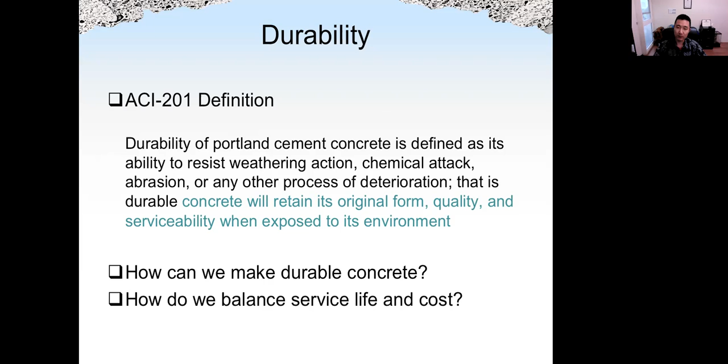There are many factors affecting concrete durability, including uncontrollable factors such as environmental conditions, and controllable factors like type of cement we use, type of aggregate. This belongs to concrete constituents, mix proportions. What is water cement ratio? How much percent we use pozzolanic materials?

Manufacturing process: how much compaction, how we can prevent bleeding and segregation, how much air percentage we use. Curing conditions, how long we cure the concrete.

For example, structure design and detailing, how much load the concrete will experience, and what's the size of the rebar, spacing of the rebar, and what is the rebar covering, or the thickness of the concrete, protecting the rebar from corrosion. So this belongs to detailing and design.

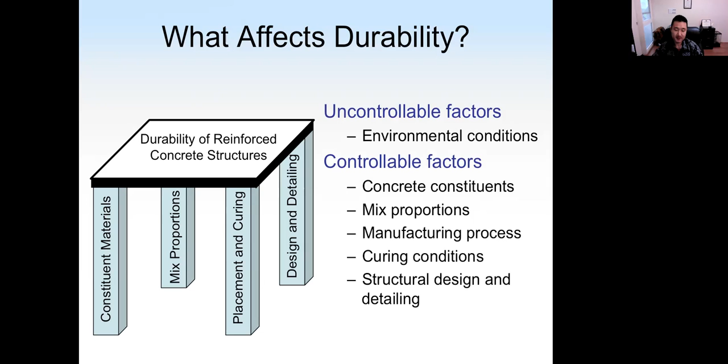Cracking and deterioration: when we have pristine concrete, there's no cracking, as long as the concrete is cast accordingly. Then the crack will occur due to loading or deterioration, such as shrinkage. When concrete has a crack, the crack will open up because water will bring harmful materials inside the concrete and do further damage. And the loading will again open up the crack.

So the crack will initiate deterioration, and the further deterioration will facilitate further cracking. Eventually, concrete will fail. The rebar protection, the concrete cover, will fall off.

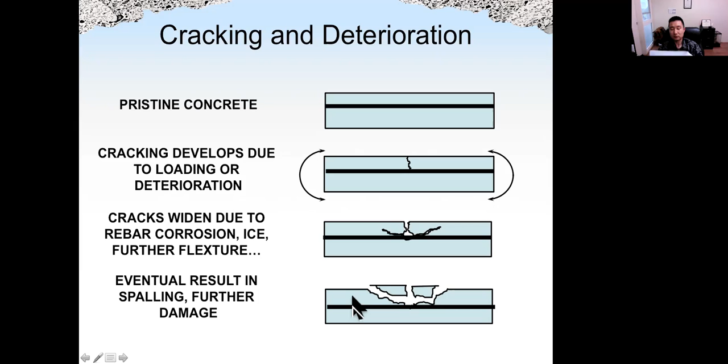So here we talk about water and concrete. We know for concrete hydration, we need water. Without water, the cement will not hydrate, so we cannot make concrete without water. But you will also know almost any type of deterioration, physically or chemically, will involve water. So let's look at the water molecule in detail.

The water molecule is a polar molecule, which means it has two ends, and the two ends have opposite electrical charge. Because of that, the water molecule will orientate along the surface of the capillary pores inside the compound. And when water is lost, we have capillary tension, and that will cause shrinkage of concrete, as we discussed in lecture number 11, which we did Tuesday this week. So shrinkage is caused by capillary tension, because water is a polar molecule.

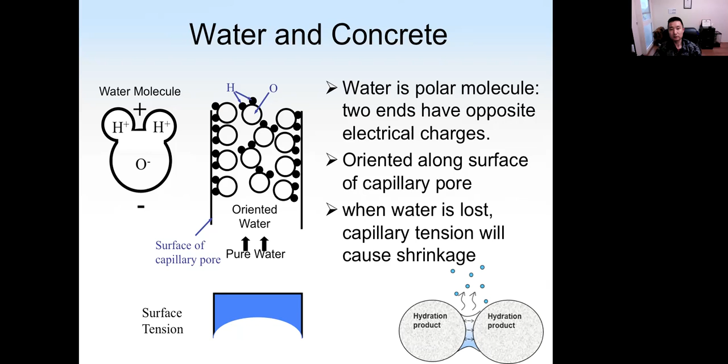Water is essential for cement hydration. Cement will not react without water, and we will not have concrete without water. Also, after we cast the concrete, curing is very, very important. The longer the curing, the better for strength and durability. So at initial age, water is good for concrete, so the longer the curing, the better for concrete.

However, after the concrete achieves its design strength, water is not good for concrete, because almost all the chemical and physical attacks involve water. Without water, concrete would last a very long time, because water is an agent of deterioration. If it moves in and out of the pores, water will also serve as a vehicle for transport for aggressive ions such as chloride, which will cause corrosion of reinforcement. Water may also bring sulfate from the soil or underground water into the concrete, and we have sulfate attack.

So is water good or bad for concrete? Depending on at what age. At early age, we do need water, without it we cannot make concrete. But at later age, water will cause all kinds of damage in concrete.

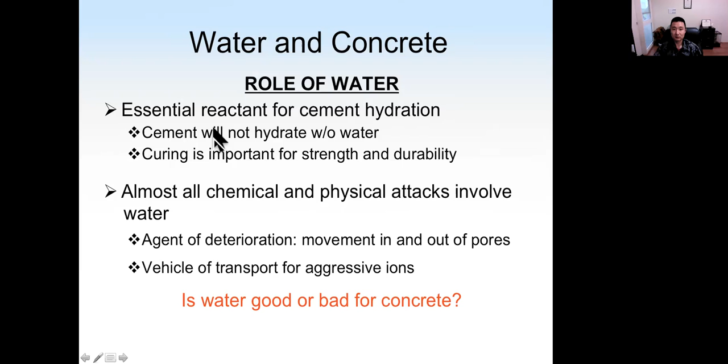So the first type of durability issues is frost damage. We also call that freeze and thawing. Before we do that, let's review three important properties of water, H2O.

The first one is liquid water has higher density compared with ice, or solid water. This is kind of a unique property of water. Other materials, the liquid is less dense compared with solid form.

The other property of water is solid water or ice is pure H2O. This means when we have a solution of certain materials, such as sodium hydroxide solution, and if we reduce the temperature slowly, and we have a mixture of water and ice, in that case the ice contains pure water, and all the salt goes to the remaining part of the water. So that's the reason why the iceberg in the North Pole is pure water, and all the salt goes into the liquid part. Of course, if we further reduce the temperature and everything becomes ice, then the salt will go nowhere and stay in the ice. As long as we have a combination of water and ice, the ice will be pure water, and all the salt goes to the liquid.

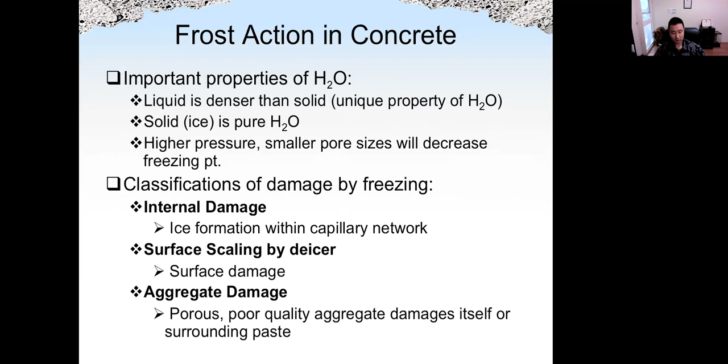So let's look at the internal frost damage, which occurs in the cement paste. There are several theories which may help explain why we have internal frost damage. Exactly which one is dominant, we do not really know. These are the potential contributing factors for the internal frost damage of concrete.

The first one is the hydraulic pressure. When ice forms, the volume will increase because the density of ice is lower compared to the density of liquid water, so the volume of ice will increase. That will cause pressure to rise in the unfrozen liquid in surrounding areas. For example, here we have an ice crystal formed. The water surrounding the ice will have high pressure because the ice volume will expand. So that may cause the concrete to crack.

Another possible theory is called osmotic pressure. When ice forms, when we have a combination of ice and water, remember in the ice all the salt goes to the remaining water, and ice is pure H2O. So the remaining pore fluid will concentrate because the salt goes into the nearby liquid. As a result, we have a difference in concentration of these salts - the liquid around the ice has a higher concentration compared to other parts of the liquid. So the surrounding unfrozen pores will drain, trying to balance the difference in concentration of salt. That will cause the so-called osmotic pressure. The remaining water will drain to the liquid near the ice, causing pressure to increase. That may damage the pores of the cement paste.

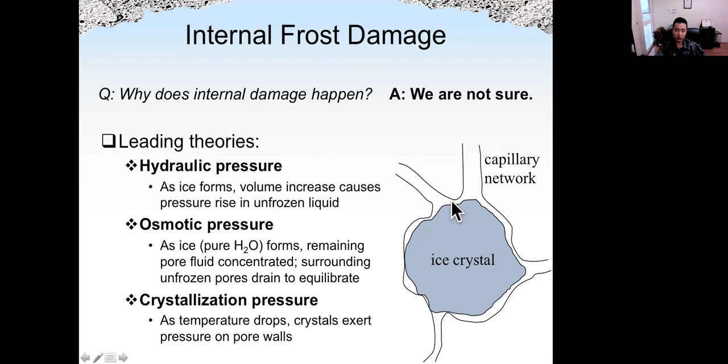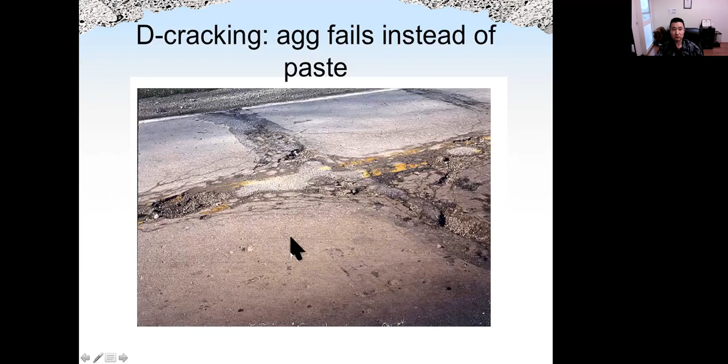Scaling damage is again caused by de-icing solution. It happens on concrete pavement. During the winter we put de-icing solution on the pavement, and that salt may cause damage in concrete. The possible reason for that is explained here.

It only occurs when we have liquid on the surface of concrete, and only occurs when the liquid contains salt, a solute, for example sodium chloride or other de-icing salt. And certain concentration will cause different types of damage.

To reduce this type of damage, we could introduce air entraining agent in concrete to reduce the possible scaling damage. The reason for the scaling damage can be explained by the so-called bimaterial effect. Let's say here we have a pooled water, and inside that pooled water we have salt, and we have concrete layers beneath that pooled water layer.

When the temperature drops below freezing, the water becomes ice, and that will form a well-bonded composite material. So we have an ice layer on top of the concrete layer. Here alpha ice means the coefficient of thermal expansion of ice, which is much larger than the coefficient of thermal expansion of concrete. So when temperature drops, the shrinkage of the ice layer will be much more compared with the shrinkage of concrete. However, we have a very good bond between the ice layer and the concrete layer. So when temperature drops, ice will contract more than the concrete.

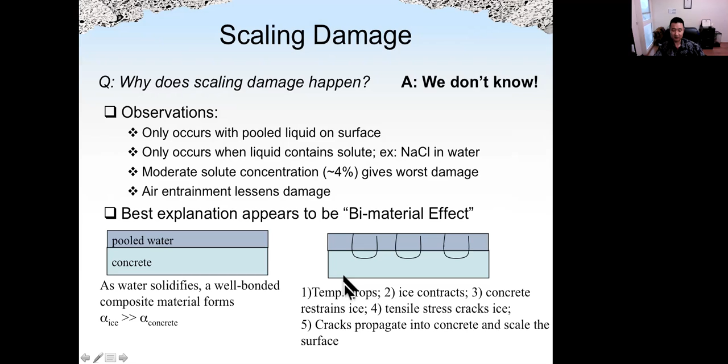We can see here this is caused by the scaling damage, and the damage is only limited to several millimeters inside the concrete, so not very deep.

Here we show how air entraining agent can reduce the scaling damage. With the same concrete but no air entraining agent, if we increase the air content, the damage on the surface is reduced, as we can see clearly from here.

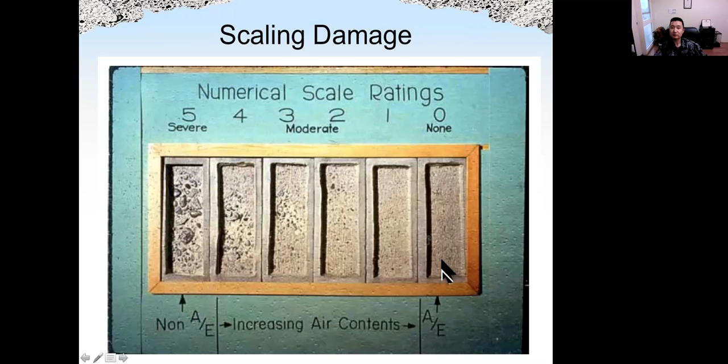So to reduce frost damage, we can use air entraining agent that will generate tiny isolated air bubbles, which are empty, so that will release the stress coming from the expansion in volume. I think we discussed this when we talked about air entraining agent.

But here it says D-cracking is not preventable by air entraining agent. Why is that the case? Remember, D-cracking is caused by frost damage of aggregate. If we introduce air entraining agent, that will introduce air bubbles in the cement paste only. So since D-cracking is frost damage of aggregate, air entraining agent cannot prevent D-cracking.

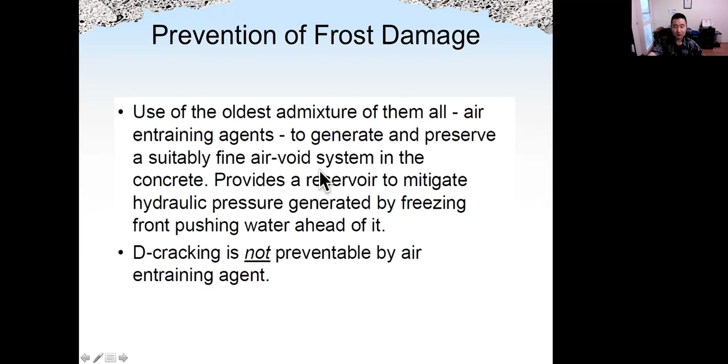All right, so the first type of durability issue is frost damage. Any questions for this before we talk about ASR?

All right, so ASR is one type of chemical attack. When we talked about aggregate, I think we mentioned ASR a little bit. So ASR is a reaction between alkalis in cement and a certain type of silica in aggregate. Not all types of aggregate have potential ASR, but certain types do.

This is the cracking caused by ASR. We also call that map cracking because the pattern of the crack is similar to maps. The cracking is generated from inside, which makes ASR very difficult to control.

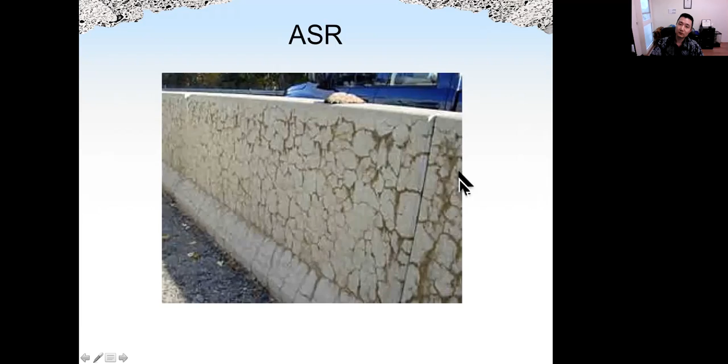So ASR has been known for a long time. The first ASR was spotted around 80 years ago, in California.

In the US, we have 160 affected dams caused by ASR. If ASR happens, it is almost impossible to repair, because again ASR is generated from within — it's the reaction between alkali in the cement and the aggregate, and the aggregate is inside the concrete. So there's no good remedy to repair ASR. ASR is also called the cancer of concrete. So the best way is to prevent ASR from the first place.

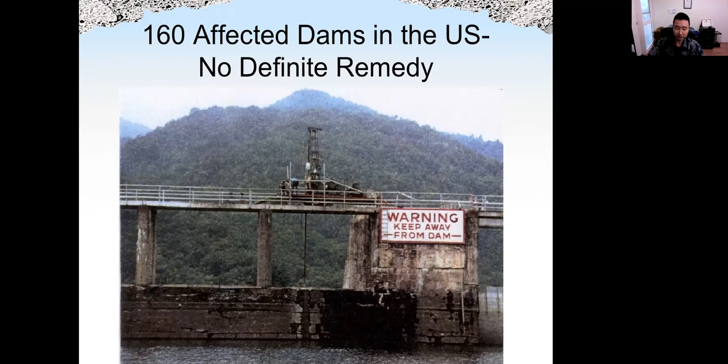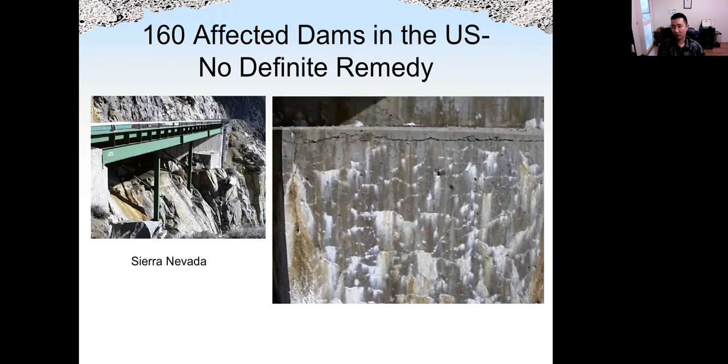All right, so here's another example from a damaged dam from ASR. You can see the whitish material coming within the cracks inside the concrete — that is the gel coming out of the concrete. So if you see something like that, you may double check if it's caused by ASR.

Okay, so another picture of ASR. The crack is generated within the concrete, so it's very hard, if not impossible, to repair.

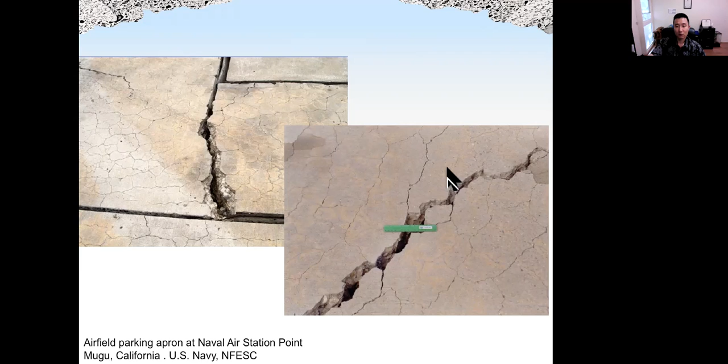So ASR is caused by alkalis — different types of alkali, potassium, sodium, calcium alkalis — they generate different types of gels. The silica is coming from aggregate. So alkali plus certain type of silica plus water will cause swelling alkali-silica gel, and that swelling will result in cracking and spalling of concrete. Remember, the gel will not swell if water is not available in concrete. So as long as there's no water in the concrete, even if we have a lot of alkali and reactive silica, there will be no ASR.

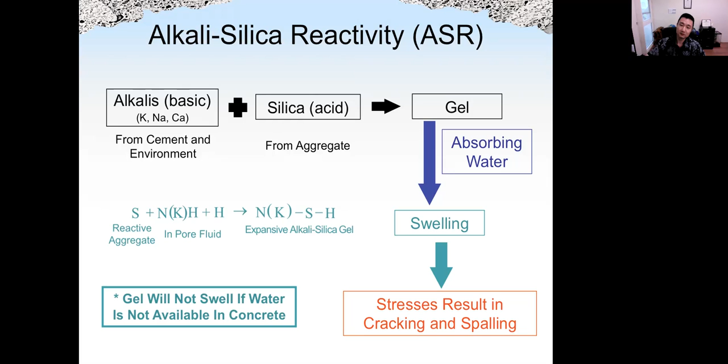Sometimes the aggregate will also crack, and so does the cement paste.

So if we put air entraining agent, it will generate tiny empty air bubbles. That may be beneficial to reduce the stress caused by this expansive gel. So air entraining agent may potentially reduce ASR.

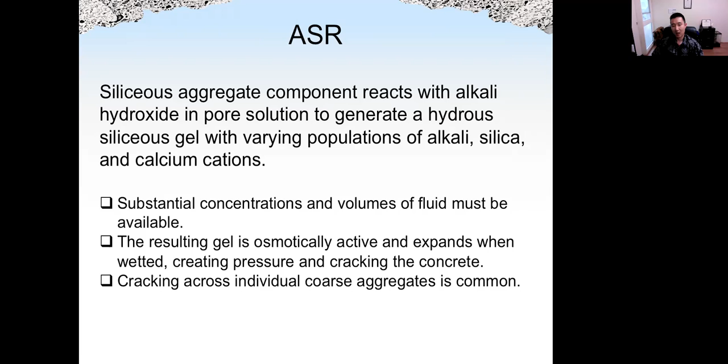That will create pressure and potential cracking in concrete. Sometimes you see the cracking across aggregate, and the crack will extend to the surface of the concrete. And then when the crack reaches the surface...

Further wetting will convert the gel into a mobile sol, which will leak out and form the whitish deposit materials on the surface, as we see on the previous picture of the dams.

And here it says calcium must be locally available for the gel to be sufficiently coherent to exert pressure, so we need calcium ions for the gel to apply the pressure. Pure alkali-silica gel has very low viscosity, so it will just dissolve in the pore solution and cannot cause the cracking.

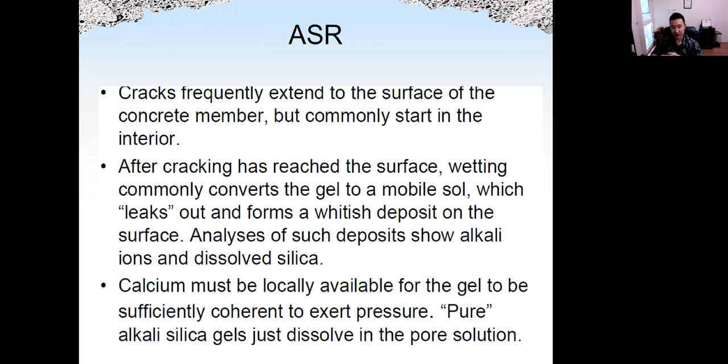So factors affecting ASR: from the part of aggregate composition is very important, specifically the nature and percentage of reactive silica. Some aggregate does not have silica at all, so we don't need to care about ASR. Even if the aggregate has silica, but if it's not reactive, we still do not need to worry about ASR.

So if the aggregate has reactive silica, then the size of aggregate will be a factor. Smaller particle size will increase expansion because the smaller particle size means the interface between the aggregate and the cement will be higher, so we have higher potential for the reaction between alkali from the paste and the silica from the aggregate.

And the amount used is also important. The more aggregate, the more potential ASR.

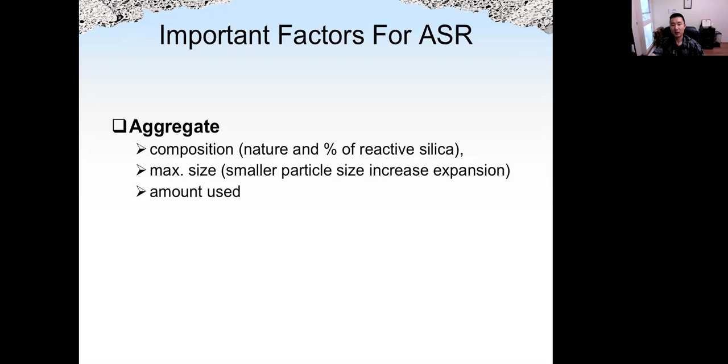We have some other tests to check the potential of ASR for certain type of aggregate, which will be discussed in a moment.

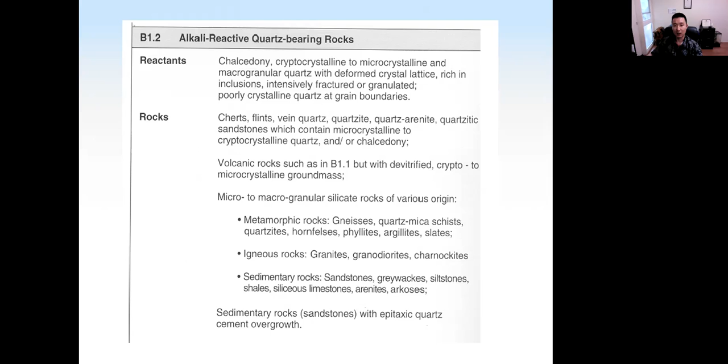Here shows a sample study. Even if all the rocks have the same chemical composition, the ASR potential is also very different.

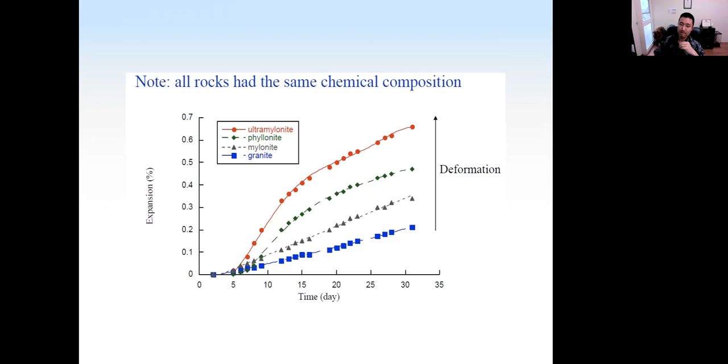From the cement point of view, because cement will contribute alkali, the alkali coming from cement, so the lower amount of alkali from the cement, the better for ASR.

Sometimes people control the percentage of sodium oxide plus potassium oxide to a certain level if ASR is a concern.

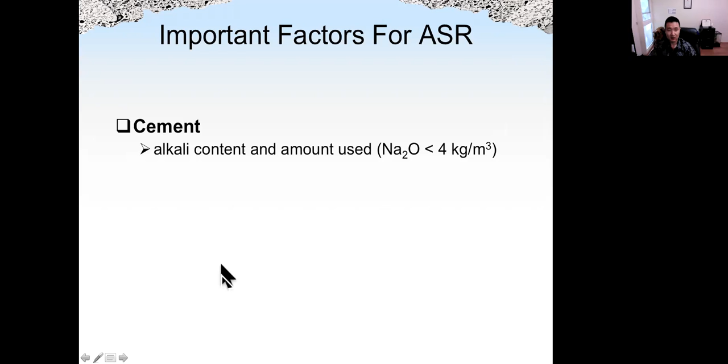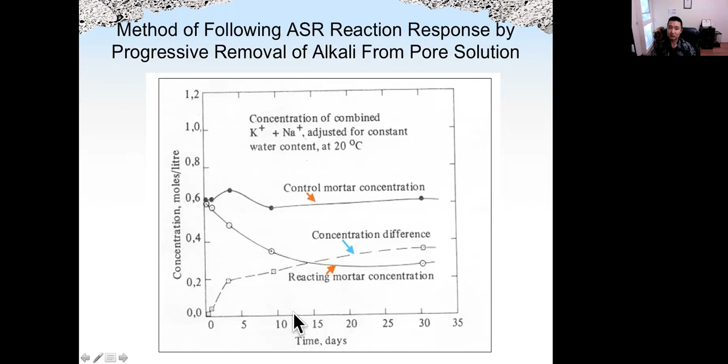The temperature of cement production may also be a factor, because the temperature during the production of cement in the kiln will affect the percentage of potassium oxide, which is another type of alkali in the clinker.

And moisture, so condition during curing. At early age, moisture curing is good because moisture curing will reduce the permeability, and lower permeability is better for ASR, actually for all types of potential durability issues.

But at later age, we should try to limit the amount of moisture if possible, because with no moisture, we don't even need to worry about the potential for ASR.

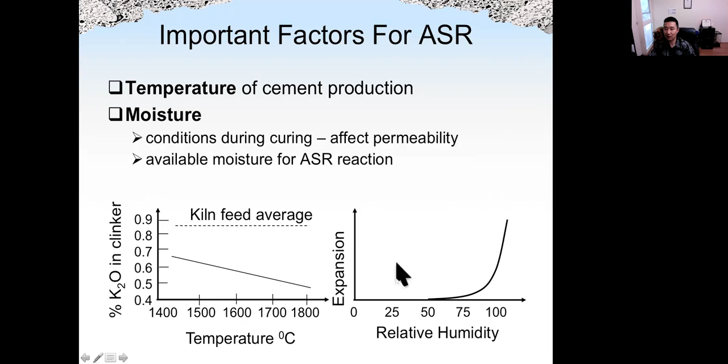We could also use the uranyl acetate test procedure. This is a very simple standard testing method by the Federal Highway Administration. It does not need any microscope. We're going to talk about the procedure, how to use uranyl acetate to see ASR in concrete, in a moment.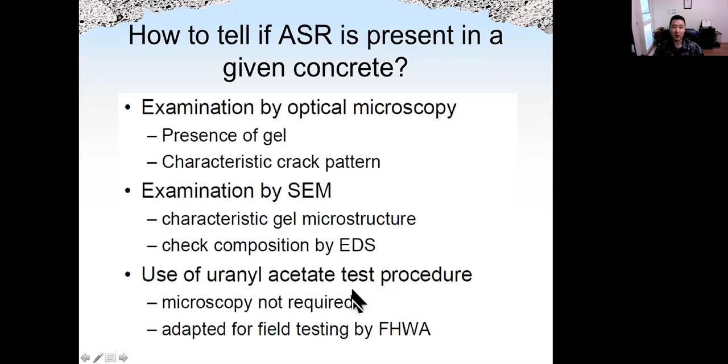The procedure for uranyl acetate testing is as follows. Some or all of the alkaline ions in ASR gel are exchangeable cations, so we use a solution of uranyl acetate, which is UO2. These uranyl ions may replace potassium ions in the gel. We apply the acetate solution, and uranyl ions will replace potassium ions in the gel, then we wash away all the excess uranyl acetate, and examine the concrete sample under UV light. Uranyl ions will fluoresce under the UV light, so we can see where the ASR gel is.

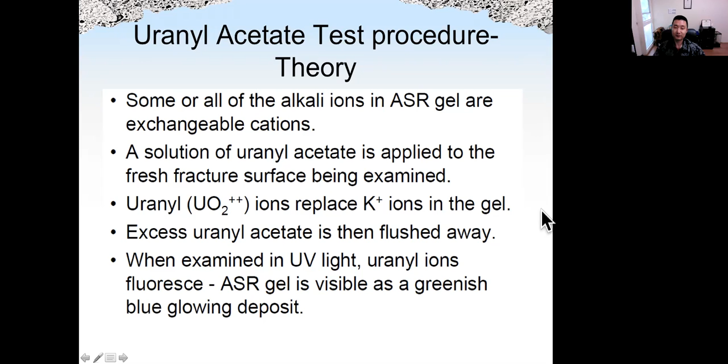As we can see from here, after the procedure, under normal light we don't see anything, but under fluorescent UV light we see the gel inside these cracks. The whitish color is the gel. So from there, we can identify the cracking is caused by ASR.

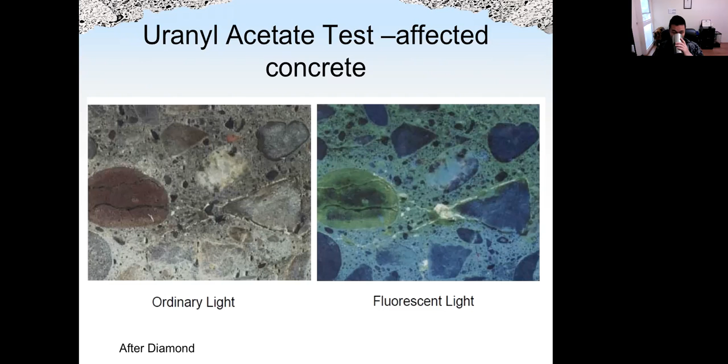Here is another commonly used test for potential ASR of aggregate - ASTM C1260, called the mortar bar test. The procedure is as follows: prepare the mortar test specimen according to the standard procedure. We prepare the aggregate and mix the mortar sample with a certain water to cement ratio. Then we insert the specimen into a 1 molar (1M) sodium hydroxide solution, and maintain the temperature at 80 degrees Celsius. The reason we insert the specimen in such a high concentration of alkali and high temperature is to see the result quickly.

We measure the expansion of the mortar bar over only 2 weeks, and measure how much the mortar bar expands. Beyond a certain level, 0.015%, the aggregate will be considered reactive. Less than that limit, the aggregate is considered inert or okay.

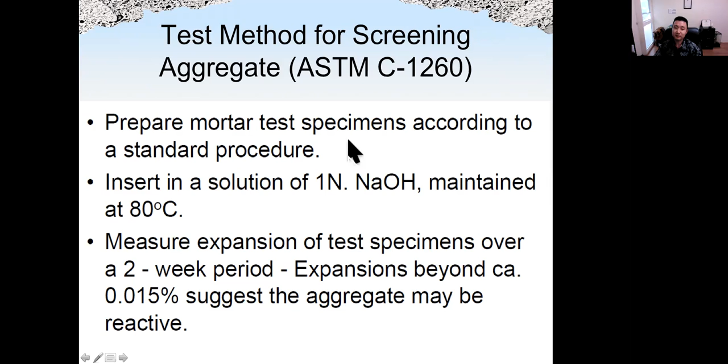So we've talked about the potential mechanism for ASR. Now let's look at how we can control ASR. Because ASR is caused by reactive aggregate combining with alkali from the pore solution together with moisture, one way to control ASR is to control the alkali concentration from the cement. We can use, for example, low alkali cement, or blended cement - which is Portland cement together with slag or fly ash - to reduce the alkali content in cement. We can also control the reactive silica.

So we can do several things. We can screen aggregate for possible ASR reactivity by doing ASTM C1260. If the aggregate is not reactive, we don't need to worry about ASR. We can also use petrographic examination, depending on the skill level of the petrographer, to see if the aggregate is reactive or not. This is, of course, done before we make the concrete - that's why it's important to prevent ASR in the first place.

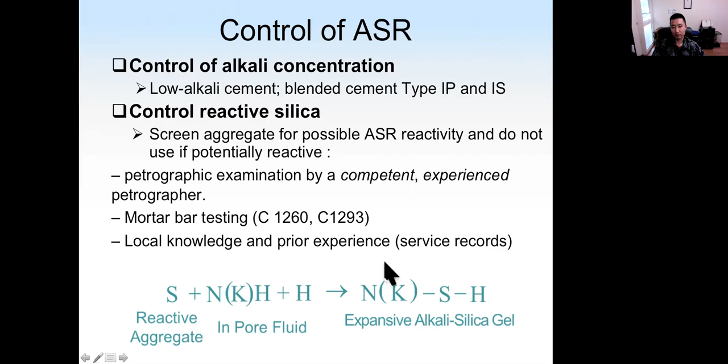From a mix design point of view, we can reduce the water to cement ratio. We can use silica fume to reduce the permeability of concrete and control the moisture. We can also alter the nature of the alkali silica gel - we have certain chemical admixtures such as lithium and barium salts, which cause non-swelling lithium or barium silicate hydrate instead. So the gel will not be expansive, will not cause pressure in the concrete, and there will be no potential cracking.

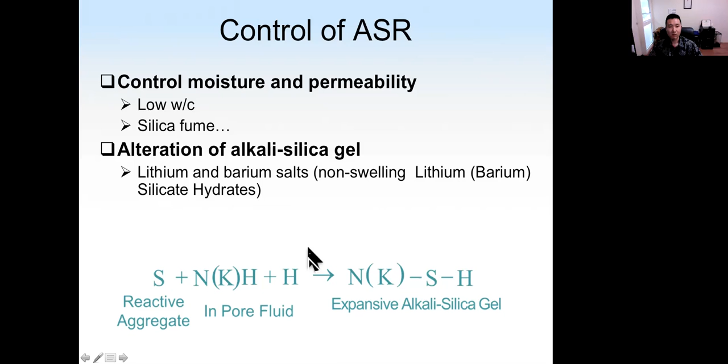Here shows an example of expansion of mortar bar prepared with 1 molar of sodium hydroxide, potassium hydroxide, or lithium hydroxide. For lithium hydroxide, the expansion value is lower compared with potassium. The reference is the control mix, which has no hydroxide.

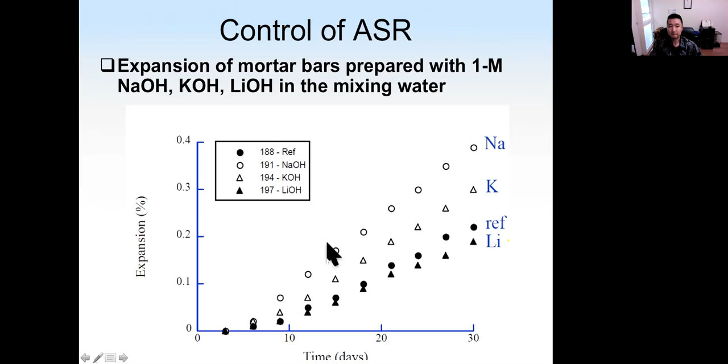More words about lithium-based admixtures. The problem is lithium hydroxide may increase concentration of hydroxide ions, so more hydroxide ions, which may generate more potential ASR. We increase alkali concentration because of that.

So if we do not use lithium hydroxide, we use lithium nitrate, so that will not increase concentration of hydroxide. So lithium nitrate is more effective compared with lithium hydroxide.

The reason for that is lithium will exchange other type of ions such as potassium, sodium, and calcium. The gel with lithium will not swell, so no swelling, no cracking.

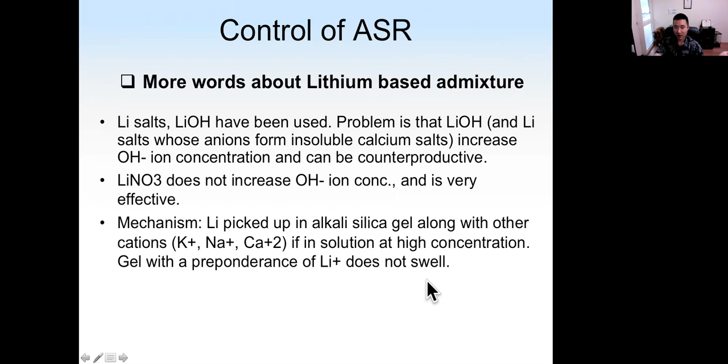The cost of lithium-based admixtures will be expensive, and we have to use a heavy dosage, so that will further increase the cost for lithium-based admixtures.

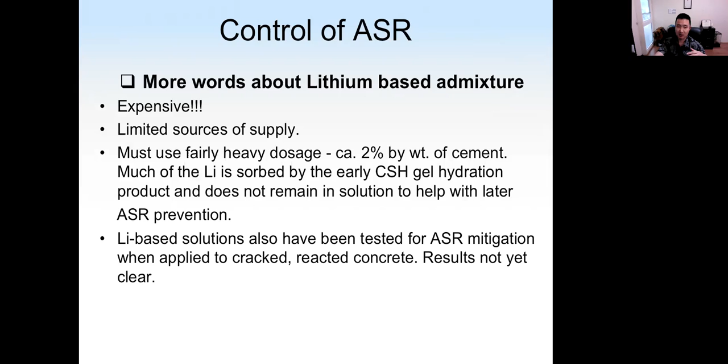Lithium-based solutions can also be used for ASR mitigation. That means when we already have ASR in concrete, if we apply the lithium-based solution, that may change the gel into a non-expansive nature, but the result may not be very clear, depending on the situations. But anyway, lithium-based solution may be used if we already have ASR cracking in concrete.

Mineral admixtures are very effective to reduce ASR. But of course, we need to mix mineral admixtures in fresh concrete, before ASR occurs. So the reason for that has many different folds.

The first fold is mineral admixture will reduce alkali concentration in cement, so that will dilute cement, reduce the pH level in pore solution, to reduce the amount of alkali.

And we know pozzolanic reaction will also reduce the permeability of concrete, so the water will have a harder time to penetrate and cause the swelling. So that is also beneficial.

The third reason is because mineral admixture will generate non-expansive calcium, sodium, or potassium silicate hydrate, instead of expanding sodium silicate hydrate. So that will make the gel non-expanding. So these are the 3 reasons we use mineral admixtures to control ASR.

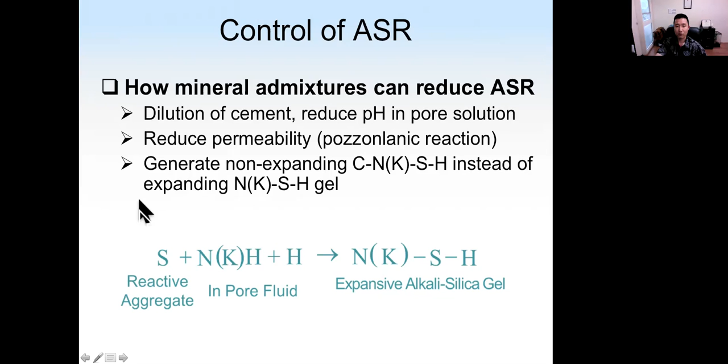More details about mineral admixtures on ASR. This is about different types of mineral admixtures. Class F fly ash usually works very well, and here is the reason.

The calcium to silica ratio of CSH is lower when class F fly ash is used, and low calcium content CSH will absorb alkali hydroxide, so that will reduce alkali in the pore solution, reducing the potential gel formation.

Class C fly ash does not work as well because the CSH cannot absorb alkali hydroxide as effectively. So this is very detailed information.

Silica fume can absorb alkali hydroxide quickly, so that is also effective. But pay attention to silica fume - we know it is very, very fine particles. Sometimes the fine silica particles will stick together and cause a very big chunk.

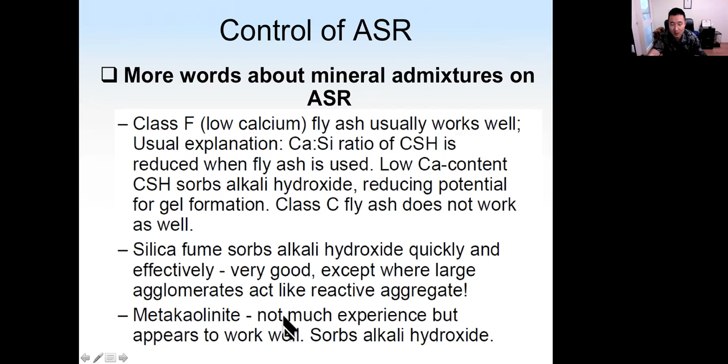Other types of mineral admixtures such as metakaolin may also work to reduce ASR. Even rice husk ash - here shows people using different dosage of rice husk ash to reduce ASR. Increasing the dosage from 4% to 8% to 15%, we see less cracking due to ASR, so rice husk ash can also reduce the potential ASR.

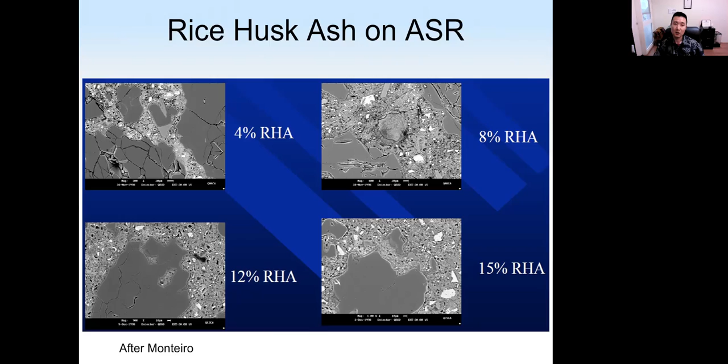Here shows the result for slag. We have different series of concrete with different percentage of slag, from 0 to 15 to 45 to 55 to 80%. What we can see here is as we increase the dosage of slag, the expansion becomes smaller.

But we have a big jump between 45% and 55%, so that means maybe the best percentage for reducing ASR using slag is 55%. Further increasing slag, we will not see a big reduction in expansion.

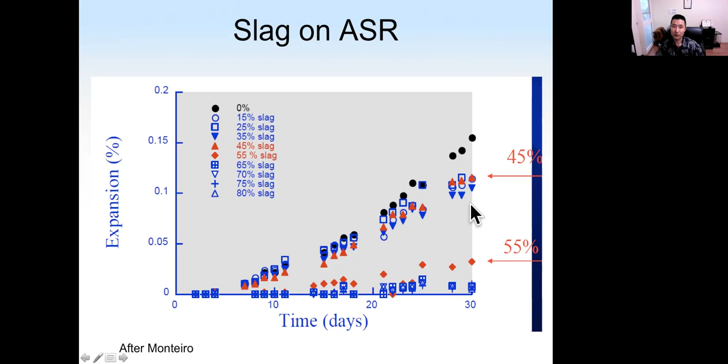All right, so that's the end of today's lecture. We discussed durability in general, and the first durability issue is frost damage, and then we discussed ASR. In future lectures, we'll discuss sulfate attack, corrosion of reinforcement, and other types of durability issues. So we have 2 more lectures on durability of concrete. All right, so let's see.